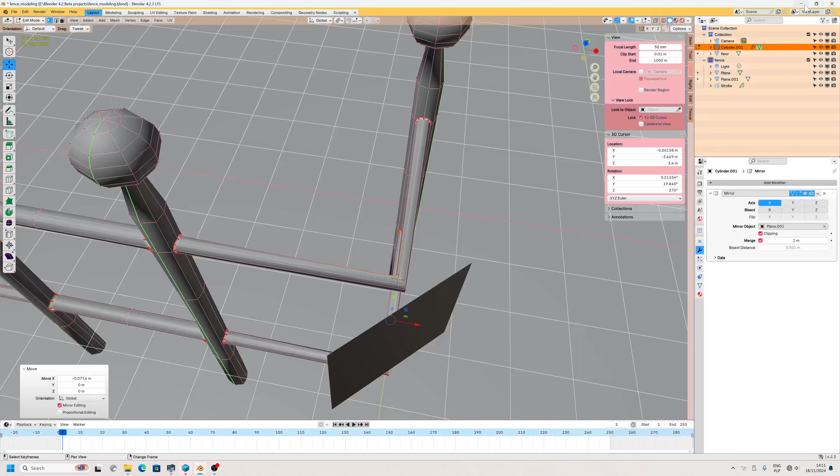Okay, today I wanted to talk about welding fences, because I know one technique which I used. I would like to show you. Maybe I will open up the scene once again.

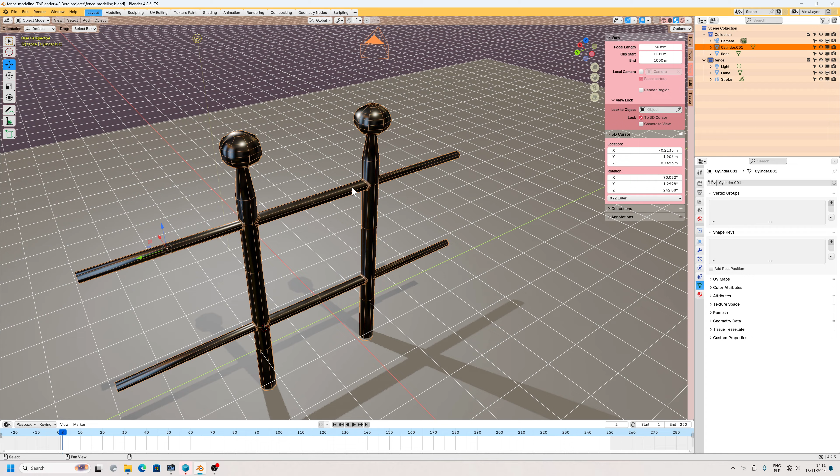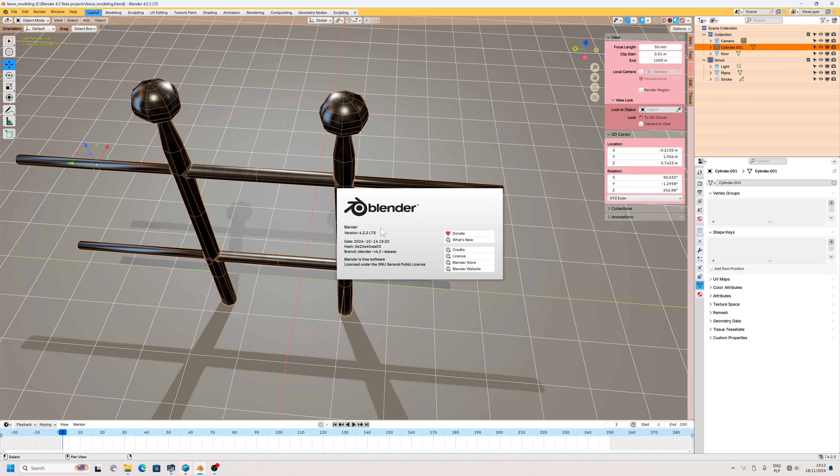Today I wanted to show you one of the techniques how to weld fences in a professional way. I'm using the Blender version 4.2.3. The reason why I'm not using the latest 4.3.0 release candidate is because of the BSurfaces add-on, which doesn't work in the beta version, the latest one.

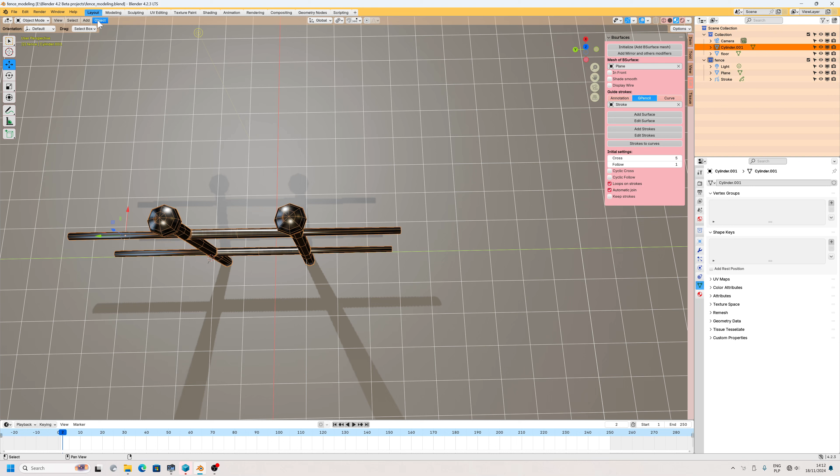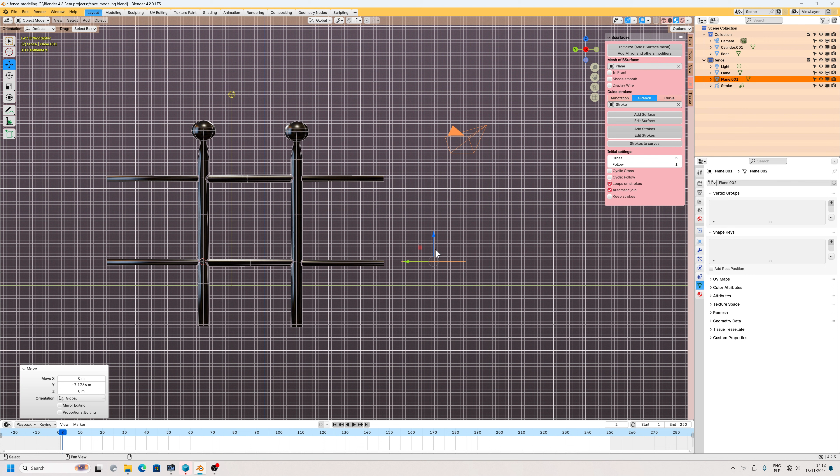Okay, today I will show you when you connect fences and you see a corner here. I know how to do that in Blender. First of all, in the scene I will add a plane because we need an object. Then in the viewport, when you hit the 5 button on your keyboard numpad, where you see 4 arrows and in the middle button 5, we go to the orthographic viewport. You can use a numpad.

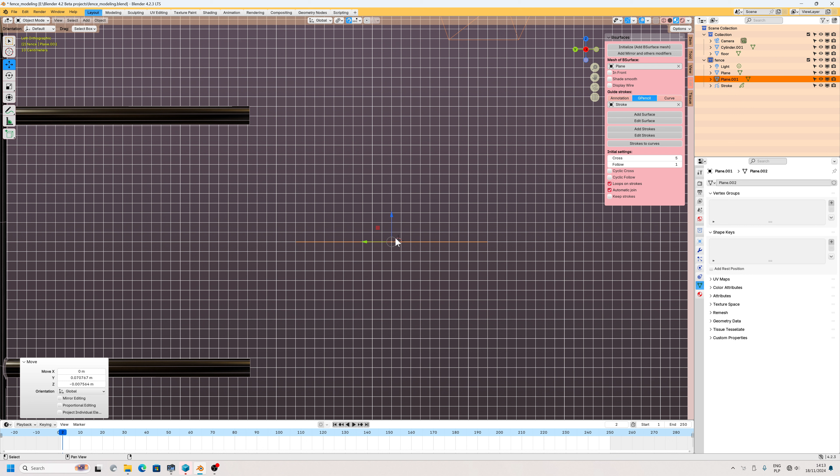Okay, cursor to selected, Shift S. If you want to rotate it to be accurate, we need to turn snapping on. I was thinking to snap to the grid. If you really want it to be very accurate, you can snap to the grid, so we have it exactly in the middle. Then we use increment because we will be rotating our plane, so we need to be very accurate.

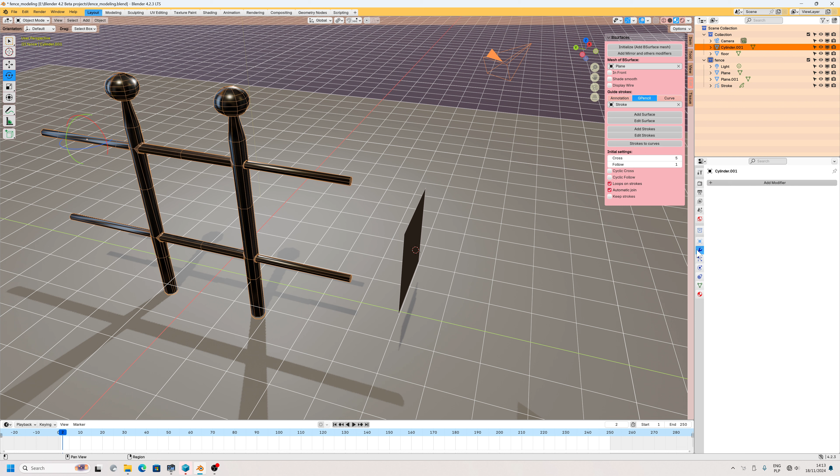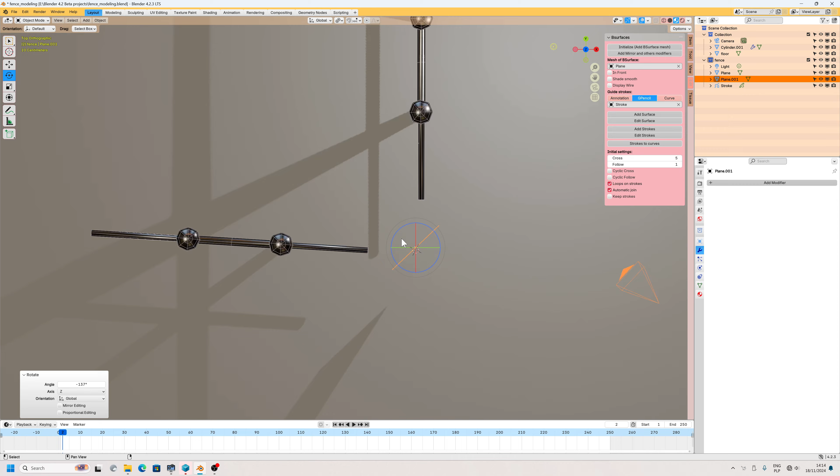After that, this object we will use for the mirror modifier to rotate our fences. Okay, now we will go to modifiers, add Generate, Mirror, and we need to choose the mirror object, because this we will use to rotate a copy of the fences. And after that, maybe I will switch to orthographic viewport so you can see what I'm doing. Actually, I shouldn't turn this off. Give me a few seconds because maybe I will have to move this a little bit lower.

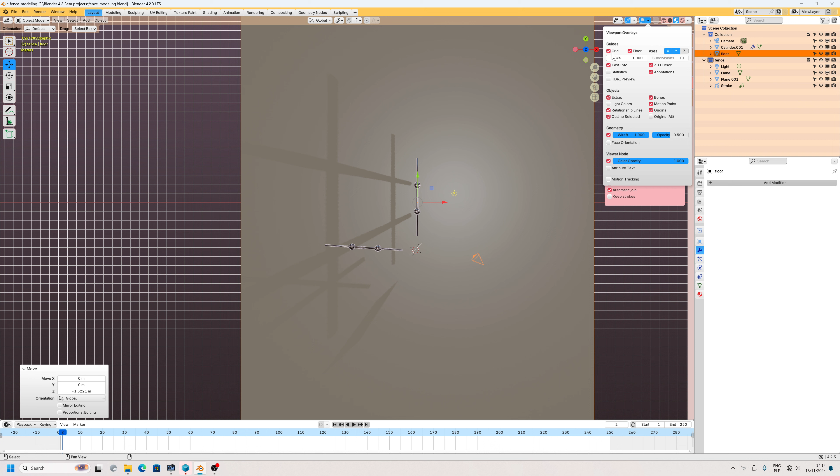I wonder why I can't see the grid. Okay, grid. I wish the grid could be lifted up. Let me know if I can manipulate the grid alone in Blender. Okay, never mind. This is more important to show to you.

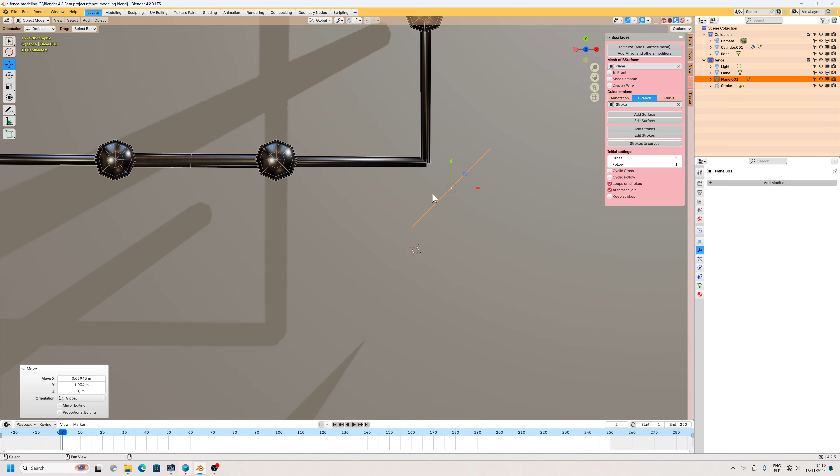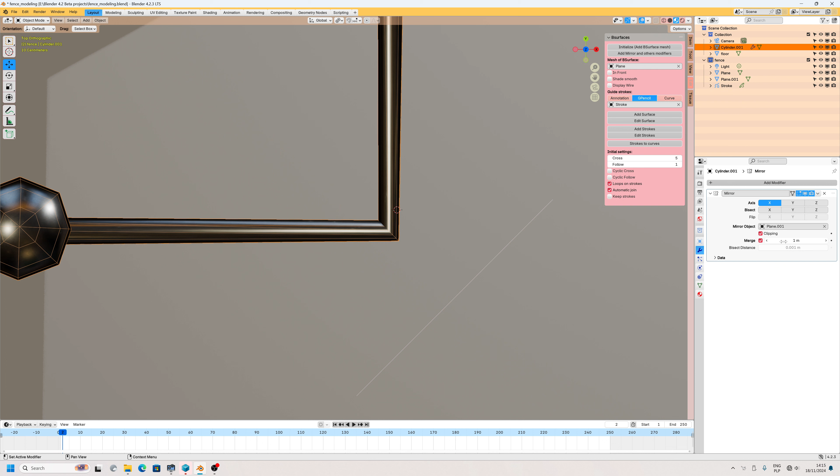Okay, when you move this, you see the corner of the fence. It is still possible to weld this. We have Merge. Oh, this is interesting, but I didn't use this. We also have to use Clipping and Merge distance. This is a little bit too much. If you want this to be visible, we can turn on edit mode for this, and also we can use X-ray, so you can see what vertices we can move, and some of the vertices we can actually move.

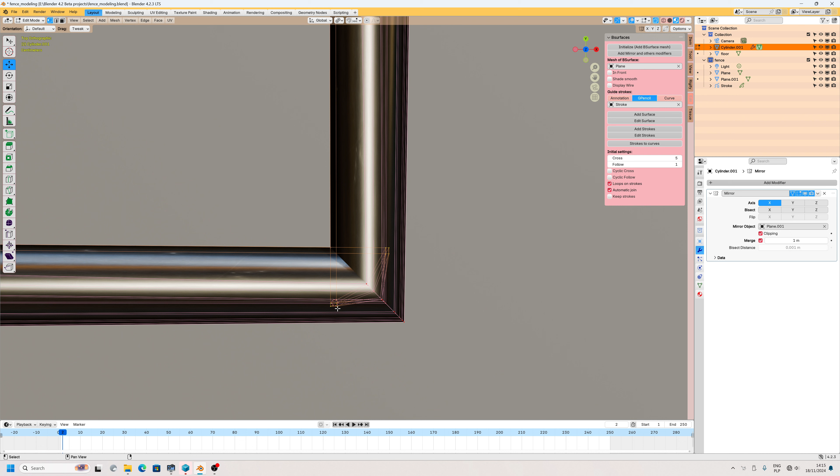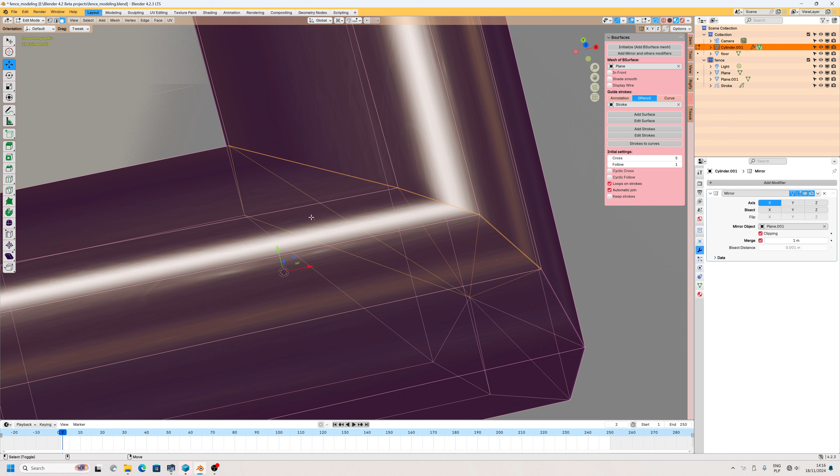3D cursor. If you pull up vertices, you can see I properly welded the fence, but please make sure if you have a polygon which doesn't have open space inside. Actually, I have to double check something. If the polygon doesn't have a hole, you still have to remove the unnecessary polygon from the inside. Okay, we can remove. I'm talking about this because I will explain to you. You see this polygon? This is a closed polygon.

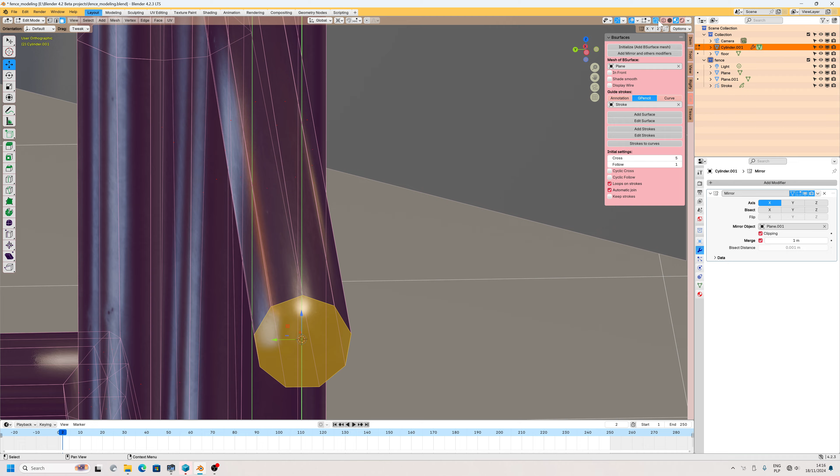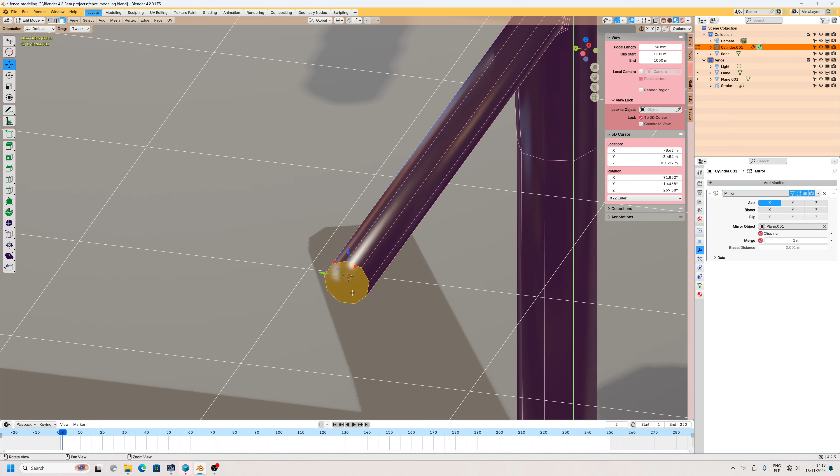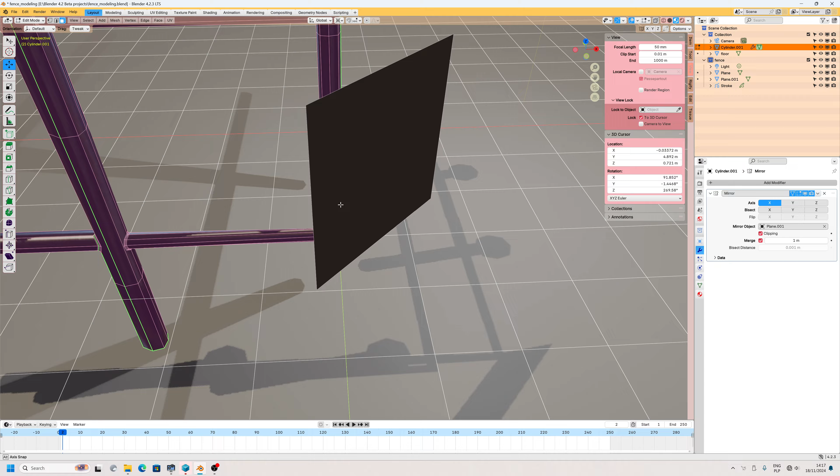Sometimes you have to delete a polygon when you weld the same object, if this has a hole, for example. Okay, view. We just have to check something. Lock to 3D cursor. Shift S, cursor to selected. I have to switch to perspective viewport, because sometimes the mirror modifier works better if you delete that polygon. This is why I was showing you the corner of the fence, because when you turn on X-ray, now it is open, it is properly welded.

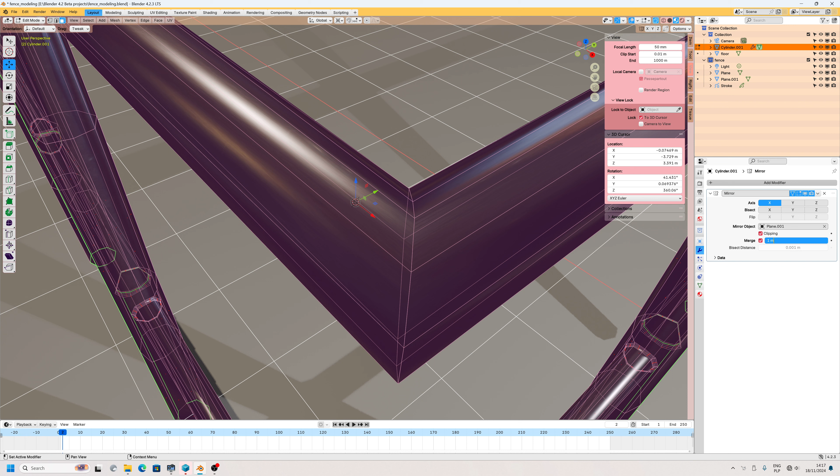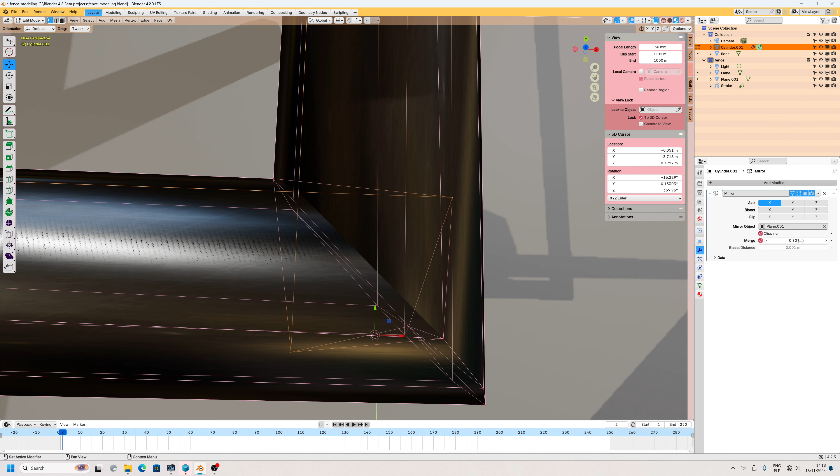Merge distance, we use a higher value, not a millimeter, but 1 meter, so you can see how this is being welded because we pulled up vertices. We will do the same here. You can see vertices here that belong to that polygon. We need to pull this up a little bit. And it depends how big a merge distance value we use.

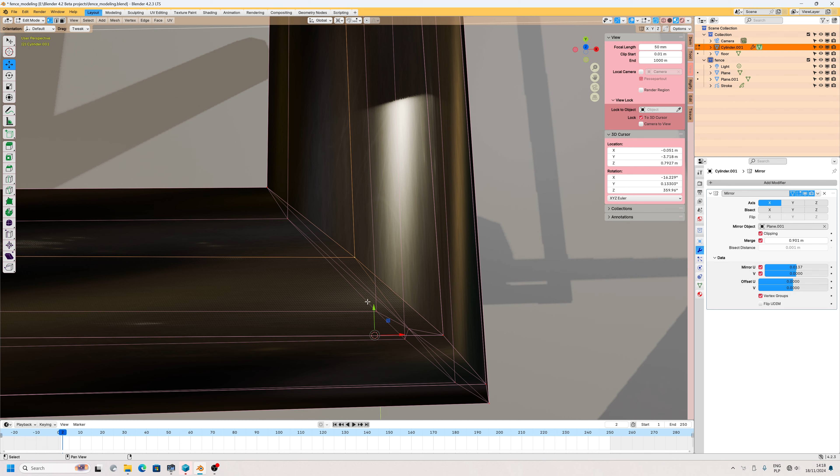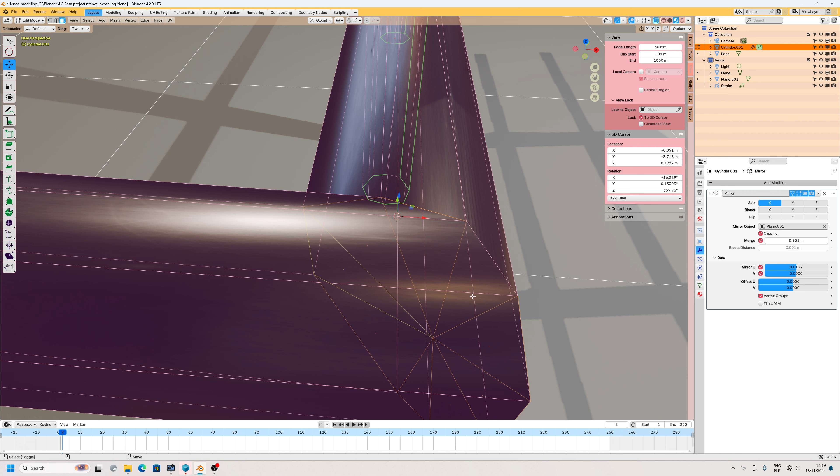I'm interested in why this data is here. This is probably for connecting texture, I believe. I don't know. I see some other settings, but I won't be talking about them because I think what I'm talking about right now is more important. You also have to consider deleting polygons here from the inside. Okay. Oh, now it's properly welded. You can see the fences here.

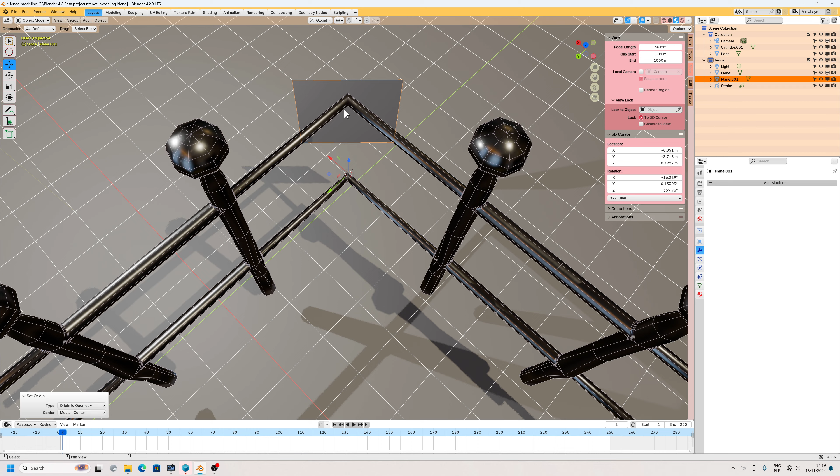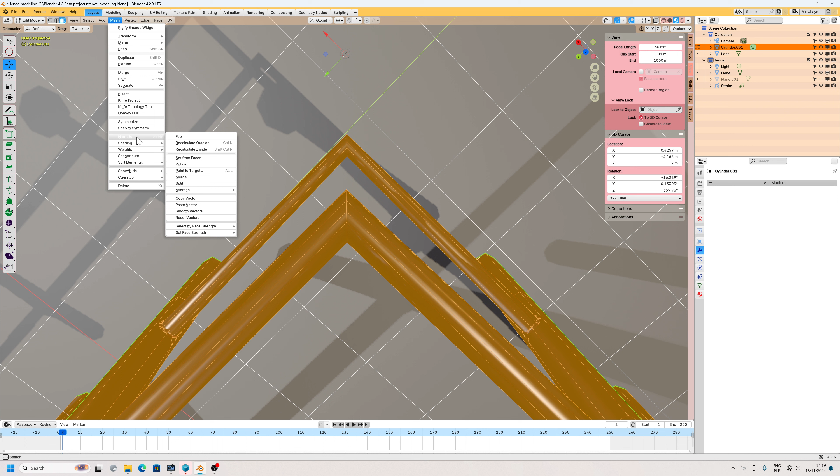After that, you can apply your modifier. Apply. If you still need to use this object, that's fine. Control Shift Alt C, origin to geometry. Shift S, cursor to selected. You can see we welded our fences without any problems. You can still bevel it, but please make sure before you bevel, you go to Mesh, Normals, Recalculate Outside, and you also apply scale in case bevel doesn't work.

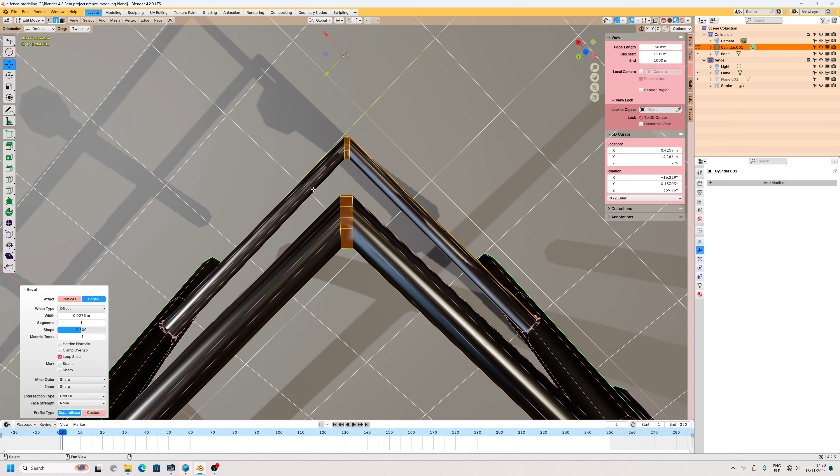I just have to check if I can weld the corners of the fences properly. Now we have proper fences.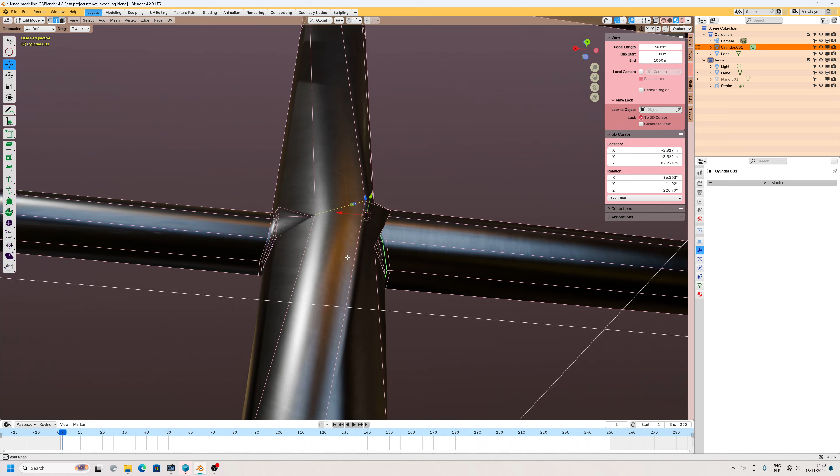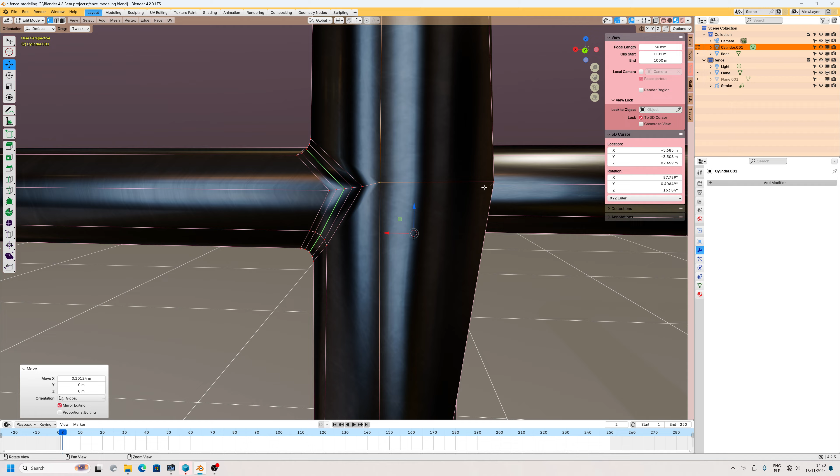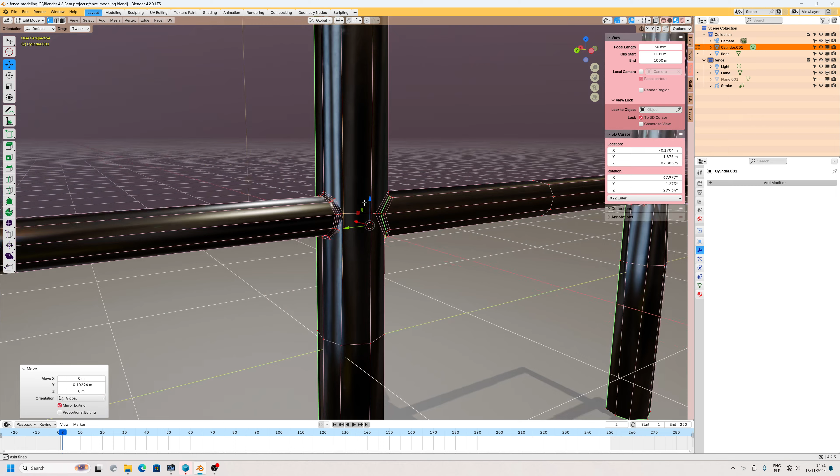Now I just have to check because I made some critical mistakes here. I moved the vertices accidentally. Oh no. I probably didn't see what I was doing with my mesh. I can still fix that. I was working too quick with the polygon object. Make sure you don't rush when you do something important with your polygon mesh, because this can lead to errors and mistakes, and you will mess up the polygons. I connected some other elements.

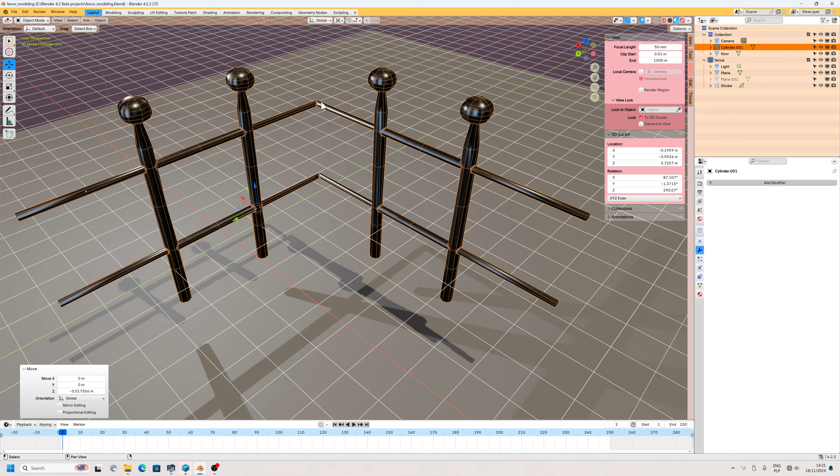But apart from that, everything else seems to be working with my mesh, and I also applied textures from the AmbientCG web page. And after that, our ready object, I will save it, and I will use the command Revert. This will delete undo operations and will speed up Blender a little bit. And I hope you like my video tutorial on how to properly weld and how to properly use the mirror modifier for fence objects.